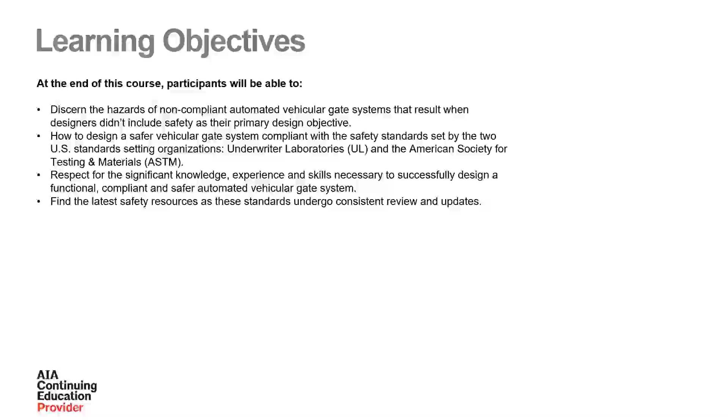A lot of information today. I don't expect you guys to retain all of it. Certainly give me a call and let me know if you have any questions related to these standards.

Anytime you automate a vehicular access point, UL 325 and ASTM F2200 safety standards come into play. Underwriter Laboratories generates the UL 325 standard, which covers the machine that moves the gate, whereas ASTM generates the F2200 standard, which governs the construction of the gate and how all the parts and pieces integrate together so that you're not creating pinch points and hazards.

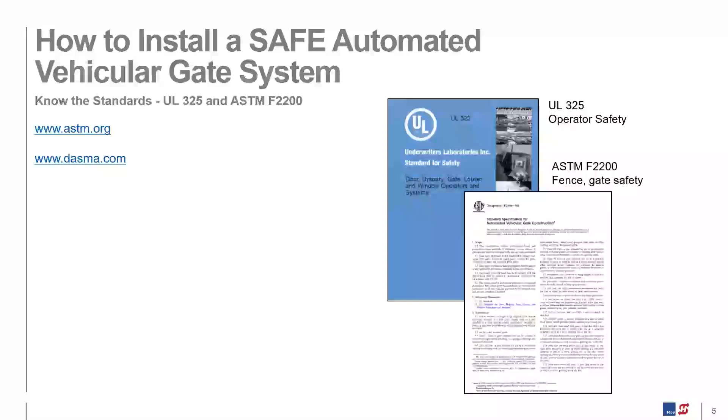These URLs are available to you guys: ASTM, of course, for the F2200 standard, and DASMA.com, which stands for Door Access Systems Manufacturer Association. It's an umbrella organization that consists of multiple gate manufacturers and gate operator manufacturers. We are one of them. They get together twice a year and come up with updates to these standards.

Back in August 2018, a couple things changed about this standard. If you're familiar with it, some of these might be a surprise to you. It's required to define all types of gates and the entrapment zones, of course.

The second bullet item is probably the thing that most encapsulates this entire standard: it requires 2 independent means of monitored entrapment protection for each direction of travel, both open and closed, for slide gates, but just one direction for swing gates. The closed direction is only required to be protected on a swing gate unless there's an entrapment zone that exists in the open direction. We'll get into that in a little bit.

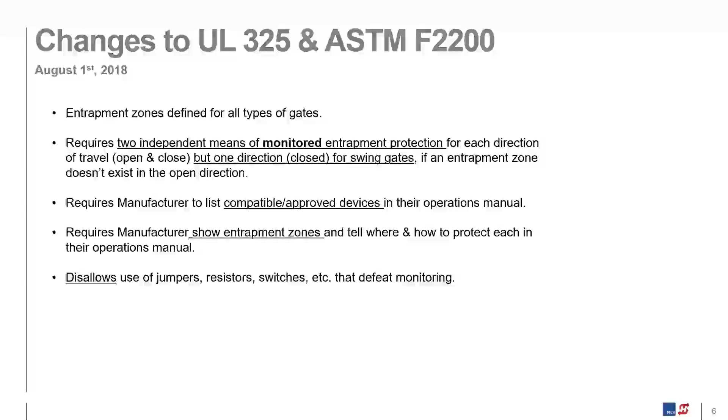It also requires us, the manufacturer, to provide a list of approved devices, and I'll be sending that information out. It requires us to show entrapment zones and how to protect those in our manuals, and it no longer allows the use of jumpers, resistors, and switches to defeat monitoring.

You'll hear from some out there that UL and ASTM standards are voluntary and don't carry the force of law. Nothing could really be further from the truth. Nevada became the first state to embrace them back in 2001, followed by Louisiana and Florida. By 2014, more than 50% of states and municipalities were including these standards in their building codes. OSHA includes this as a compliance requirement at the federal level, and it's also included in the International Building Code, IBC. So these standards definitely are not voluntary.

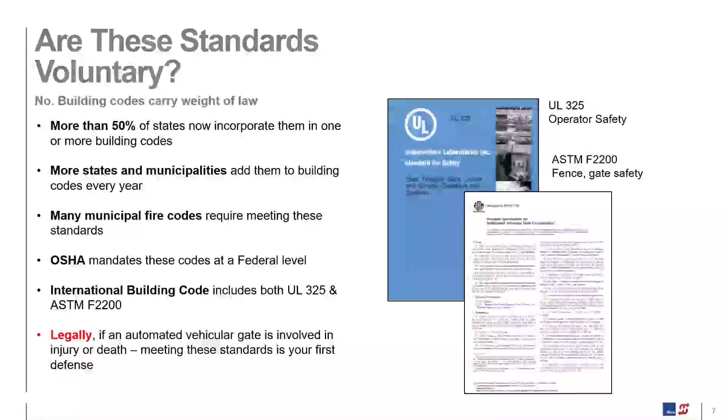The moving gate can cause serious injury or death. Believe it or not, these things do happen. A couple examples here: on the left, a young boy in Las Vegas unfortunately lost his life on this system. What happened is these kids would actually get in and out of the facility - this is an HOA facility. They put this pad-mounted swing gate through the fence line, and the kids would crawl through this gap to get in and out. One kid was crawling through there, the friend dropped his bike on the free exit loop, activated the gate, and unfortunately got him caught up in the gate system.

That could have been alleviated or mitigated by reducing this gap down to 2¼ inches - you're going to hear that measurement a lot throughout this presentation. That would have been compliant with the standard and would have prevented that issue.

On the right here, up in Mukilteo, Washington, there was a young boy who was unfortunately walking by a slide gate that didn't have proper fallover protection. That gate fell over, hit him on the head, and unfortunately he perished from that as well.

And just one more here, at Dickey Stadium, there was a janitor leaving work. You go through this gate system - we're not supposed to have pedestrians walking through a vehicle access point, but he was doing that. He had two things that he did here that we could have mitigated. He was able to reach through the gate panel and operate the gate while doing so - that access control should have been out about 6 feet. Really, the requirement is no closer than 6 feet, can certainly be further out. And the gate panel should have had proper coverage, bringing those gaps down to 2¼ inches up to 6 feet on the gate panel. Had both those things been done, that would have mitigated the issue.

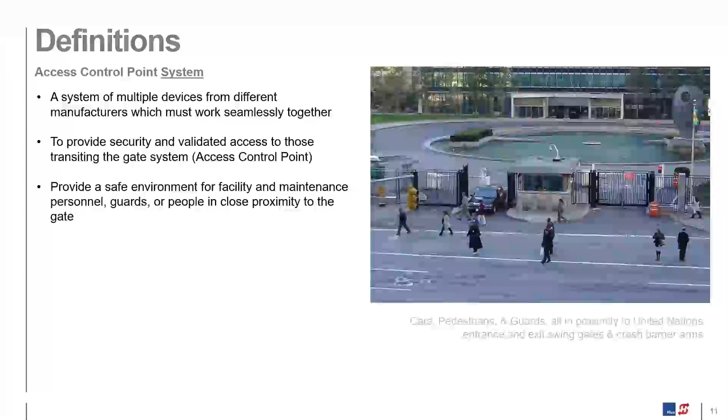Access control points can be hazardous to people, of course, as I've just mentioned, and also cause damage to vehicles if designed without adequate safety considerations. So as a specifier, you want to know how to specify the proper equipment and safety devices that result in a safe installation. Again, safety is really the most important design consideration here. Even for something like a nuclear power plant or a very high security facility like an airport or critical infrastructure, safety really needs to be at the top of that list.

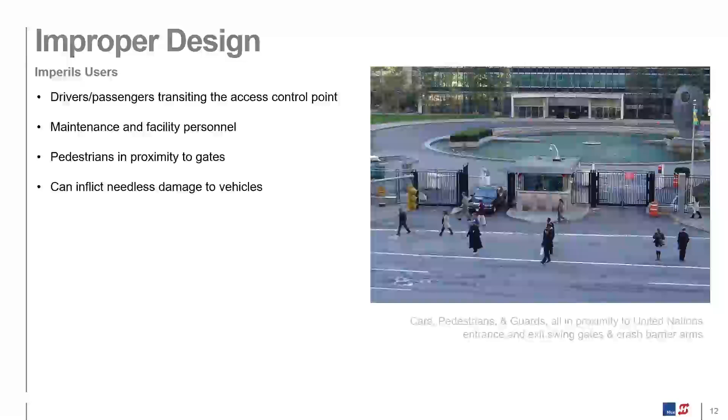UL 325 governs the machine that moves the gate along with the entrapment protection devices. It also calls out specific installation requirements like signage and placement of the safety devices. UL listed operators are typically tested by an independent laboratory - we use ETL. They'll test the gate operator and accessories and certify that they meet UL 325 requirements.

As I mentioned before, the most reliable resource, the best place to find the most up-to-date version of UL 325, is going to be the back of our manuals.

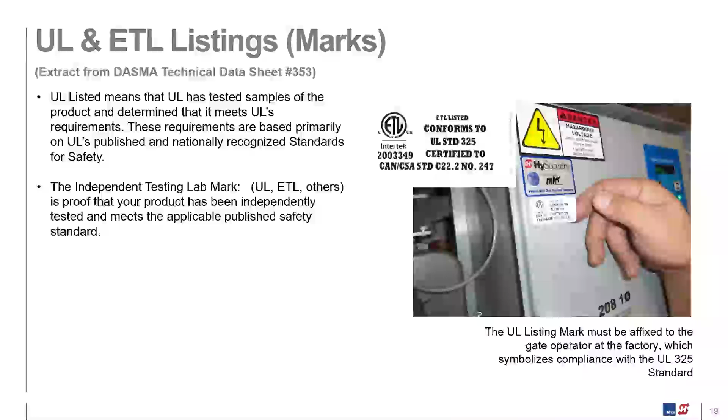UL calls out their classes in 4 distinct classes. Class 1 is up to 4 single-family residences. Class 2 is going to be more of a commercial environment, like an office park or multi-family environment.

One important thing to note on class 1 and 2 with a slide gate: class 1 and 2 have a speed limit of 1 foot per second on the slide gate operator only. When you get into class 3 and 4, there's unlimited speed limits. There are operators that'll go as fast as 3 feet per second and carry as large as a 5,000-pound gate panel that quickly. You don't want to put something like that on a class 1 or 2.

Class 1 and 2 are really characterized by general public access for the most part, whereas when you get into class 3, that's going to be off the beaten path. This is going to be more characterized by people traversing this access point that have credentials, a card key, they're supposed to be there, as opposed to general public.

Class 4 is going to be your high security environment. So anything that is critical infrastructure, like this United Nations building, is a good example. Airports, food, energy, anything that's considered high security would typically be class 4. This is where you're often going to find crash barriers as well as standard gate operators.

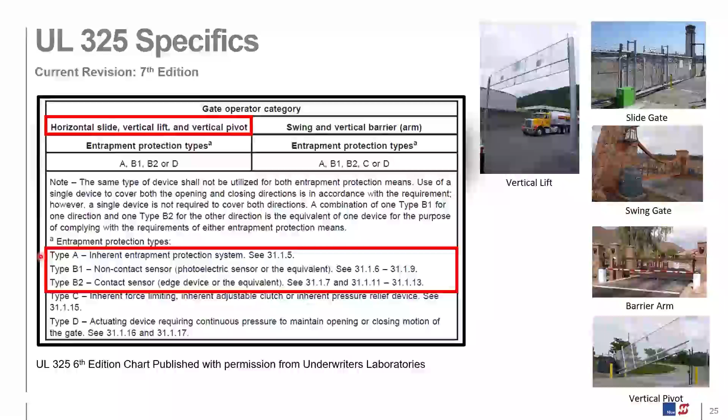Remember I talked about the need to have 2 independent means of entrapment protection, protecting both open and closed direction. This type A inherent entrapment sensor built into the operator is your one means, your first means of entrapment protection. Then you're left to decide on your secondary means, which is either type B1, otherwise known as a photo eye, or type B2, a contact sensor, otherwise known as a gate edge. You can use either one or a combination of the two. We'll get into that in a bit.

When it comes to swing gate operators as well as traffic control arms, pretty much the same thing applies. The only difference is instead of type A, we're utilizing type C, which is basically their swing gate or barrier arms version of the inherent entrapment sensor. It's basically a force limiting clutch that's built into the operator, and then you're left to decide on the secondary means of entrapment protection.

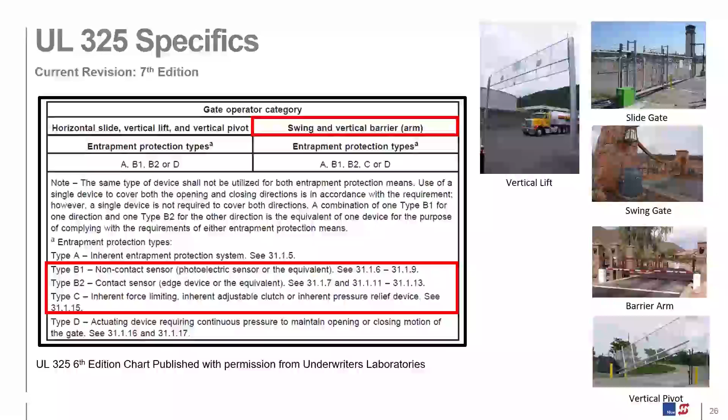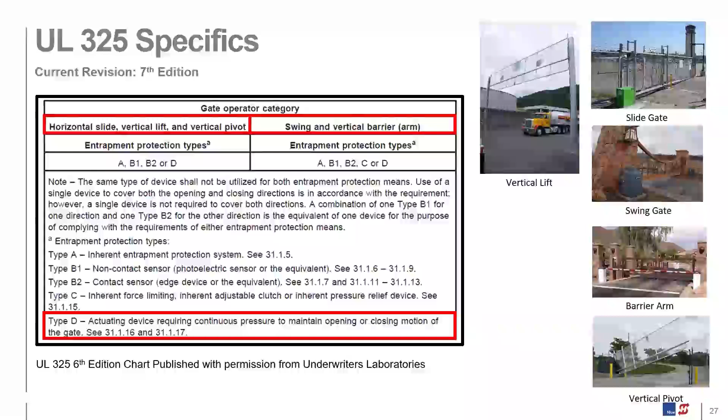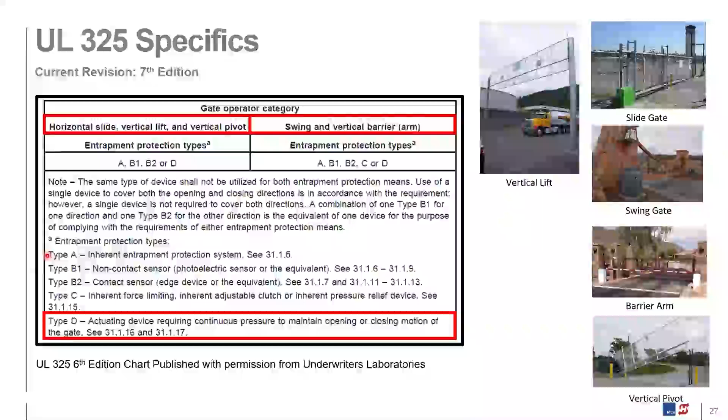Type D is a continuous pressure button. Let's say you've got a guard at a prison who has line of sight, either through video or in person. He can see the operator, can see the gate moving, presses that button, the gate starts moving, lets go of the button, the gate stops. So it's full control over the gate with that button. That would be considered a typical class 4 environment where they would use maybe this type D along with the inherent entrapment sensor built into the operator, and they're good to go.

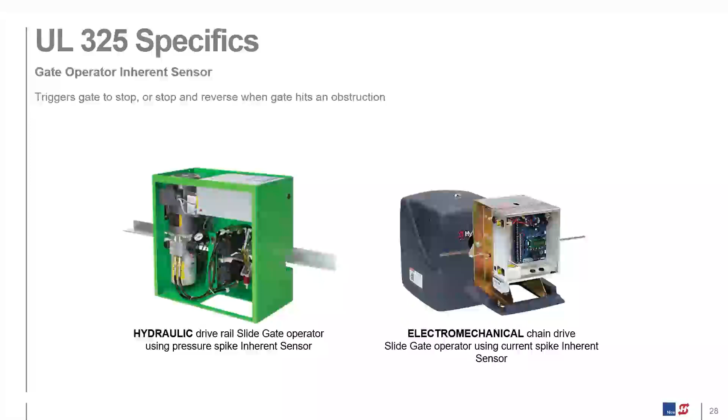Conversely, an electromechanical operator, very much the same end result, but it's looking for a spike in current. When it hits an object, it sees a spike in current, it stops and backs up. And then we're talking about the type C, their version of the inherent entrapment sensor for both barrier arms and swing gate operators - that's going to be some kind of force limiting clutch system built into the operator.

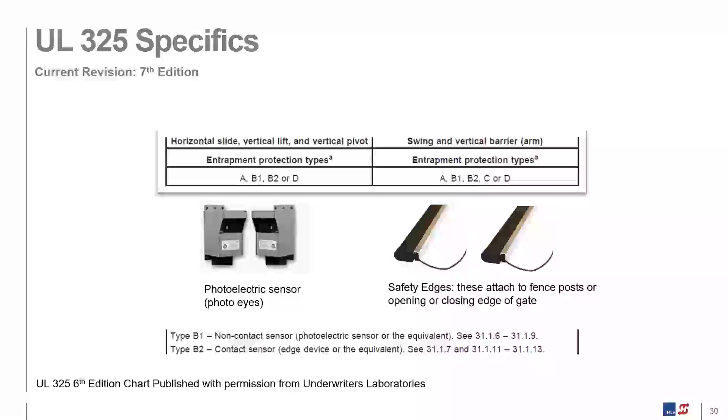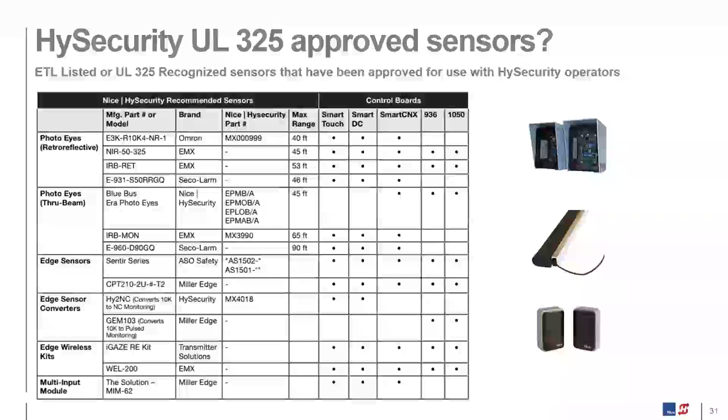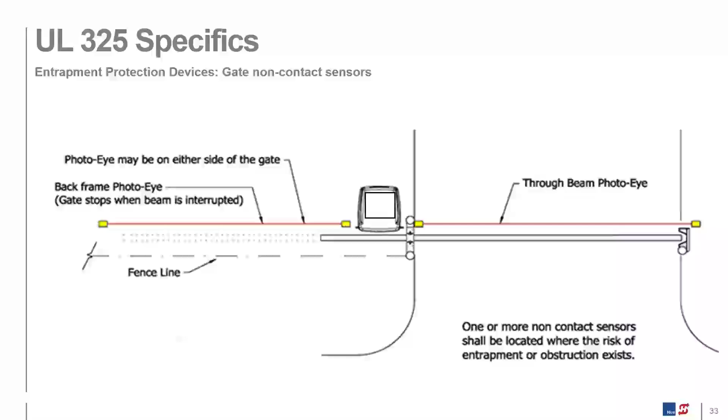So here's an example of utilizing photo eyes to protect both open and closed direction. As I mentioned, it's required on a slide gate to protect both directions. The old standard was just the closed direction - it's now required to protect both. In this case, they've got photo eyes covering the open, and then another set over here covering the closed. Plan view of that. Again, it used to only be required to provide this photo eye set for the closed direction - it's now required to provide the open direction as well.

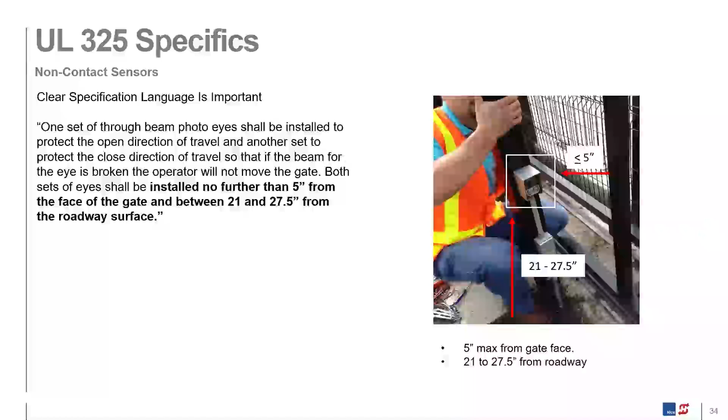Where to place these photo eyes - the recommended approach is about 5 inches off the face of the gate and between 21 and 27.5 inches off of grade, typically post mounted like you see in this photo. This is a suggestion, and there's a number of ways to do this, but that's the typical location for these.

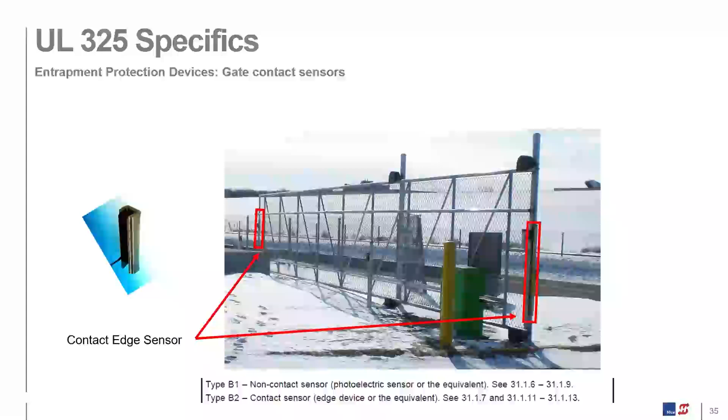In this case, they've used gate edges, both leading and trailing edge, to cover both open and closed direction. That is also compliant with the standard.

So I talked about the different types of gate edges. You've got wireless at the leading and trailing edge, and you've got the hardwired here on the guideposts. When do you need to use these? Well, if there's an entrapment zone that exists between the gate panel and that guidepost, then it's required.

Either put some material in there to bring that gap down to 2¼ inches, which is compliant, or put a hardwired gate edge here, which runs through conduit up into the operator and terminates on the control board. Either one is going to accomplish the task and be compliant. So if you have a little Johnny riding the gate, for instance, and he hits that gate edge, it's going to stop, back up, and not draw him into that entrapment zone.

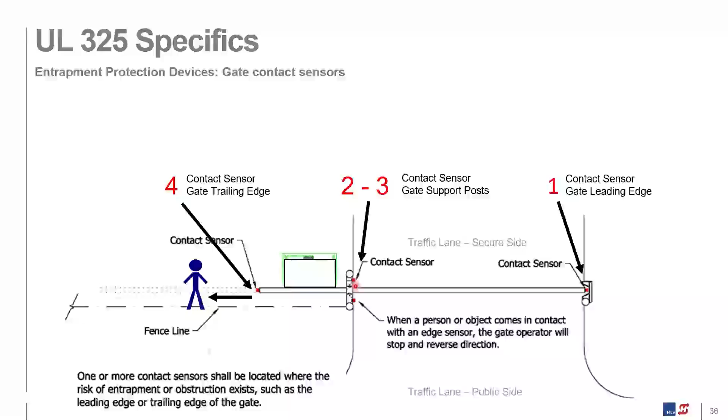A couple of things to know: they must hit an object to work, whereas a photo eye does not. They use battery for the transmitters. Those batteries typically last about 2 years and need replacement, and they're subject to climate wear, so they'll need to be replaced once they wear out.

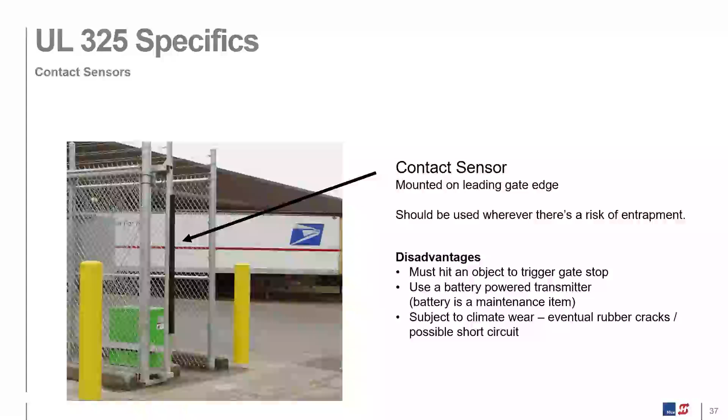This single family residence application is a class 1, and has a 1 foot per second speed limit on the slide gate again. Inherent entrapment sensor built in, and in this case they've used gate edges at the leading and trailing edge of the gate panel to cover both open and closed direction. You can actually see the transmitter right here for the gate edge.

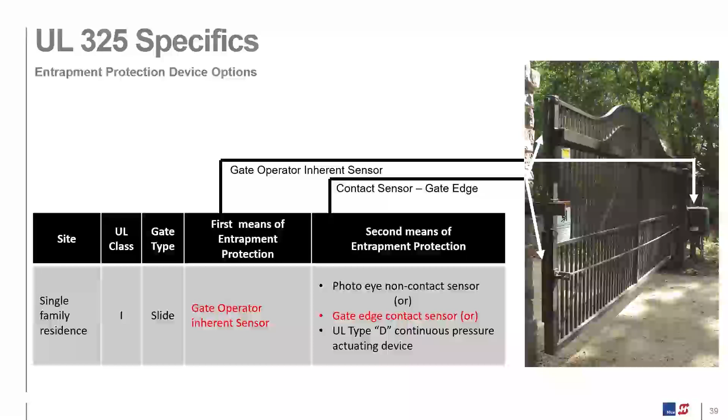Having said all of that, you can tell there's a number of combinations of ways to approach compliance. You could have a combination of gate edges and photo eyes, etc. Our recommendation for slide gates is to go with photo eyes. The reason being that most of the installations we're involved with have a lot of radio frequency traffic, RF, and those wireless gate edges can cause havoc with that kind of thing.

So just to get around that, we recommend using photo eyes for both open and closed direction, and then putting either some material in here or a hardwired gate edge if there's an entrapment zone that exists between the gate and the fence line.

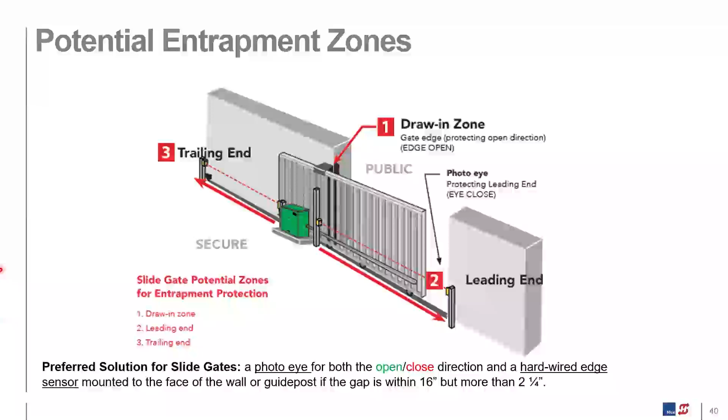For swing gates, as I mentioned, it's only required to protect the closed direction unless there's an entrapment zone in the open direction, in which case you'd want to put a photo eye in that zone.

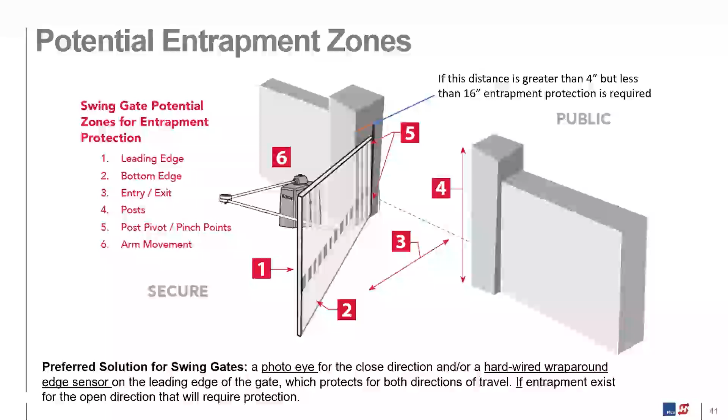Warn before operate is built into all operators, but it used to be required as part of the standard, is no longer. However, it's a really good idea to continue with that. It is something you can disable. If you're in an HOA facility where that's going to be an annoyance, it can certainly be turned off.

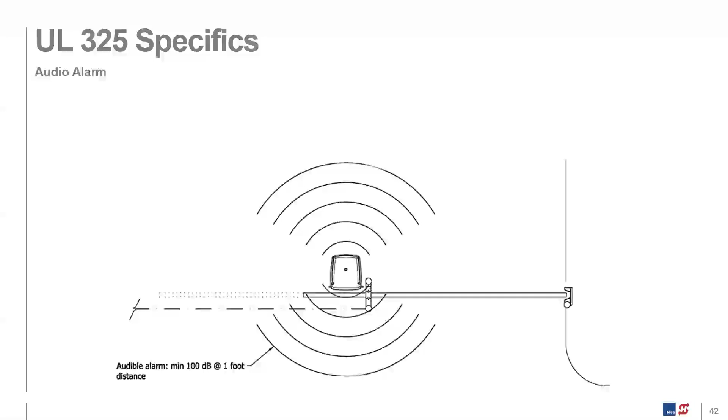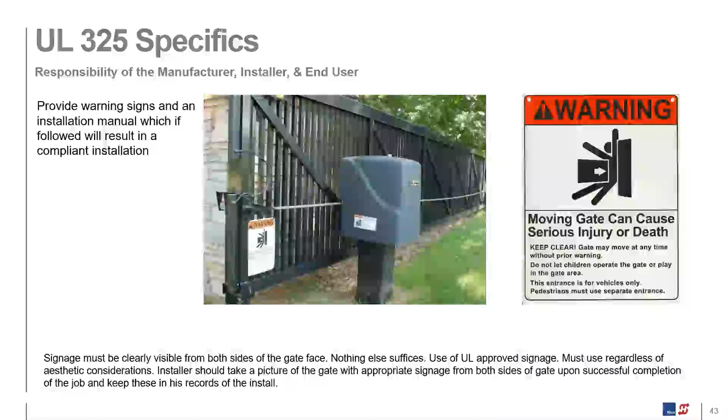Anytime you automate a vehicular access point, separate pedestrian access is required. A lot of people are surprised by this. We don't want pedestrians walking through the vehicle access point. It's not required to have a PED door for every automated access point, it just needs to be an obvious way for pedestrians to get in the facility without having to go through the vehicle access point.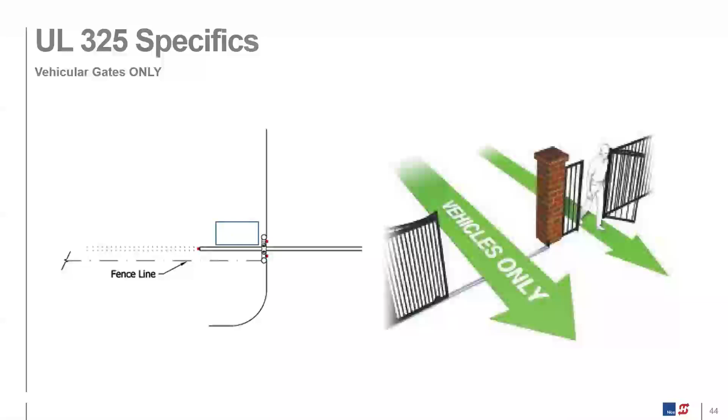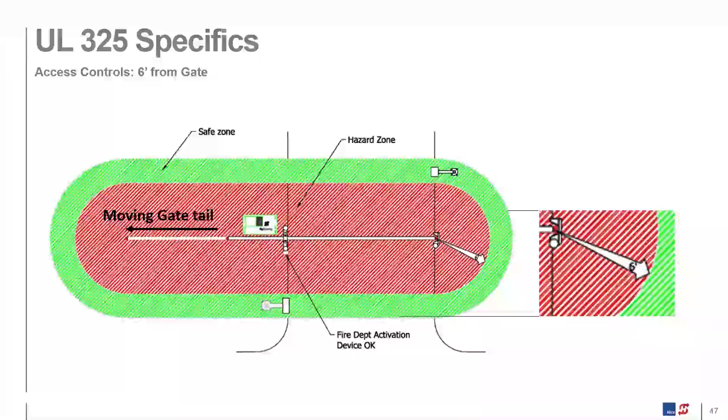So access control, as we mentioned before, that janitor leaving Dickey Stadium was able to reach through the gate and operate the gate while his arms are through the gate system. So the requirement here is that anything such as a card key system, a gooseneck, a keypad, anything that's going to require somebody to roll their window down, that needs to be no closer than 6 feet from the gate system, 360 degrees around the gate system. That includes both ingress and egress. Can be further away, but no closer than 6 feet. We're trying to reduce or mitigate the likelihood of this happening.

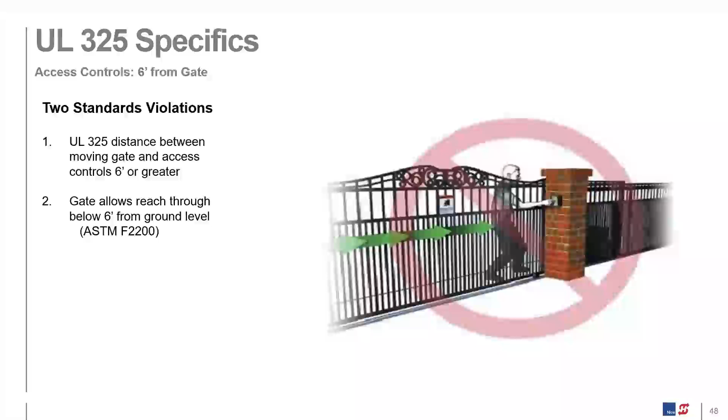When it comes to barrier arms, they do not fall under the UL 325 safety standard unless a barrier arm is moving within 16 inches of a fixed object. So that could be a bollard, a fence line, you name it. If it's out in the open like this, there's no requirement for any additional safety devices other than the Type A inherent entrapment sensor system that's built into the operator.

However, I recommend people put photo eyes under their barrier arms if they can. It's just a belts and suspenders approach to it. And if you did so, you'd put it like this. You'd want to put the photo eye directly underneath the gate arm and provide protection there for anybody walking through that access point.

You'll notice in this graphic that we're showing in-ground loops. Loops are for vehicles, whereas what we're talking about is safety for people. But loops are very important. You want to make sure you do have vehicle detection loops. If you don't have those, you likely hit the vehicle with your gate. So it's a very good idea to make sure you're putting those in there.

If you're not familiar with loops, what it typically is, is a saw cut into the pavement. They'll put loop wire in here and seal over the top of that. They'll run a conduit off the corner up into the operator, and those loop leads will terminate on a loop detector. This wire is creating an electromagnetic field 360 degrees around that wire.

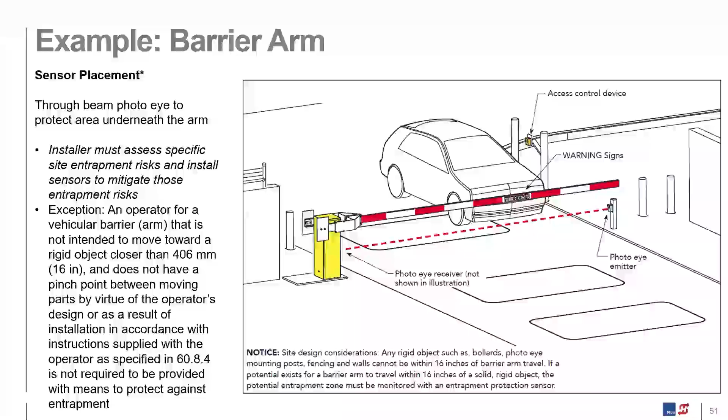If you're ever specifying a barrier arm, just make sure you specify a good quality one with a bumper on the bottom. I like to comment on this photo. You'll notice that there is both an automated swing gate and a barrier arm here. Obviously, in this case, the system got an open command and everything went open at the same time, which is fine.

But oftentimes what you'll do here is connect the two operators and sequence them. So in that case, the swing gate will go open, and when it hits its open limit, it sends an open command to the barrier arm to let the vehicle through. So it's a form of traffic control, and can also be a form of mitigating tailgating.

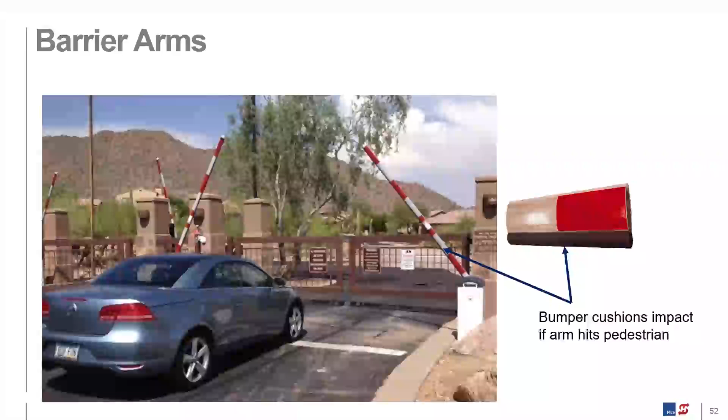All right, so that's UL 325. Let's jump into ASTM. This is a standard that was established back in 2001, and it dovetails with UL 325. So anytime you're automating the vehicular access point, ASTM F2200 comes into play just as much as UL 325 does. You'll find that most gate manufacturers are going to build their gates in compliance with the standard, but oftentimes there's going to need to be some customization to the gate to maintain compliance.

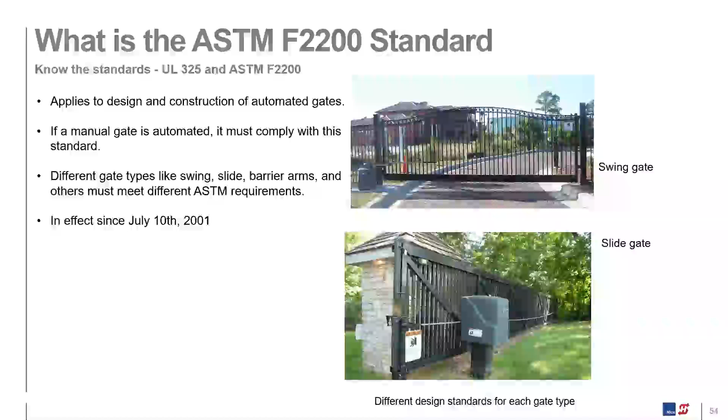ASTM defines an entrapment zone as a space between any part of a moving gate and a stationary object. When that space is within 16 inches but greater than 2¼ inches, the standard considers that an entrapment zone. So we're talking about this gap here, between the fence line and the slide gate operator. This is the gap we're measuring. If it's within 16 inches but greater than 2¼ inches, it's considered an entrapment zone.

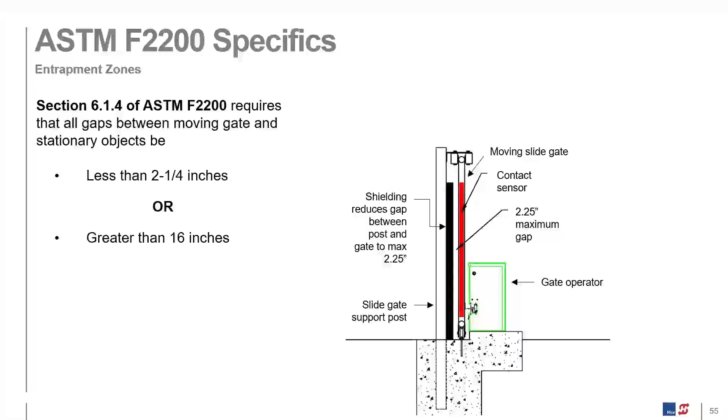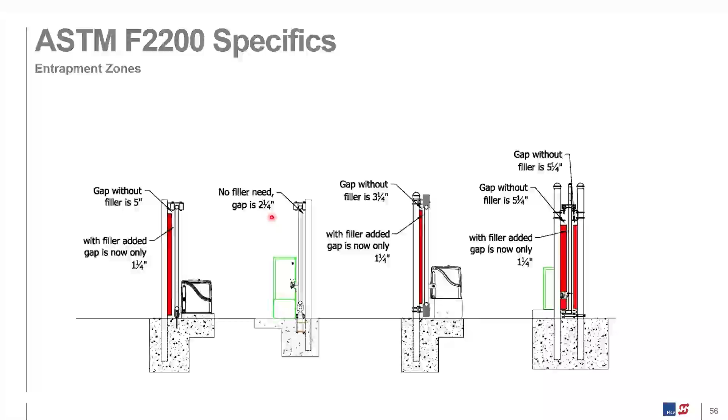The one on the right is out of compliance. The one on the left is likely within compliance at 2¼. In this example, they did a good job of screening off here, but providing this is within 16 inches, they should have put some screening in here as well. Obviously you have to cut out a notch for the slide gate rail, but that one should have been covered as well.

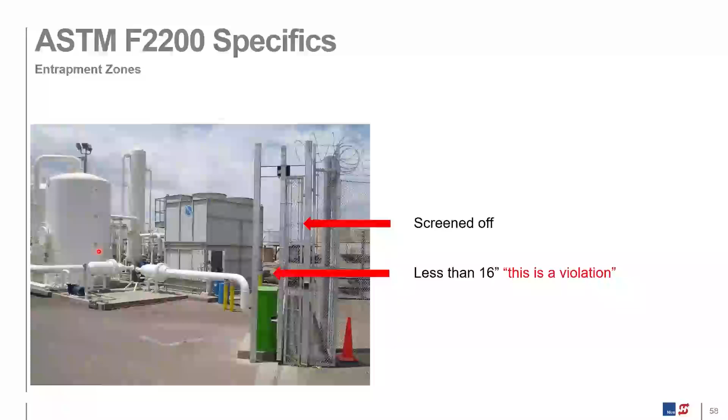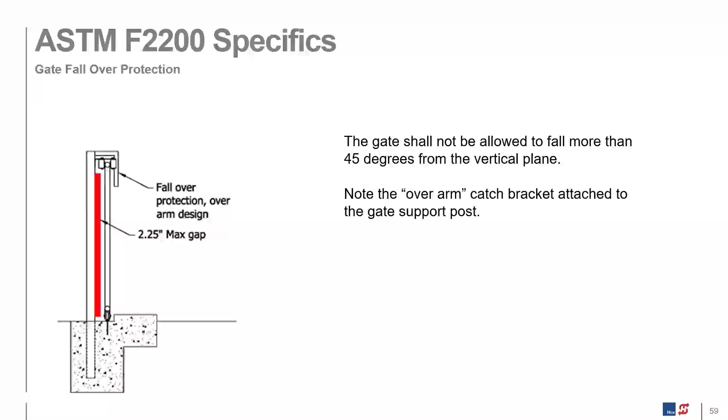Fall over protection - we talked about that slide gate that fell over and hit that kid. If they had proper fall over protection, that would not have happened. You can utilize an over arm design like you see here, that's fully compliant. Typically you'll see something like this, but basically what you're looking for is to make sure that the gate, if it becomes detached from the operator, cannot fall over more than 45 degrees.

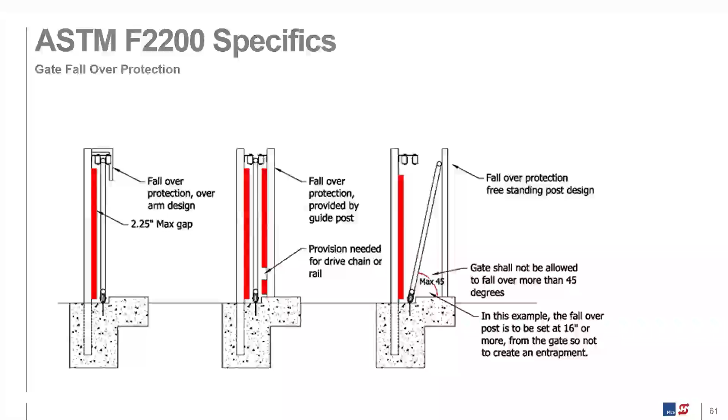This is a great example of it done properly. You can see through the entire travel of this gate panel that their fall over protection is applied all the way through.

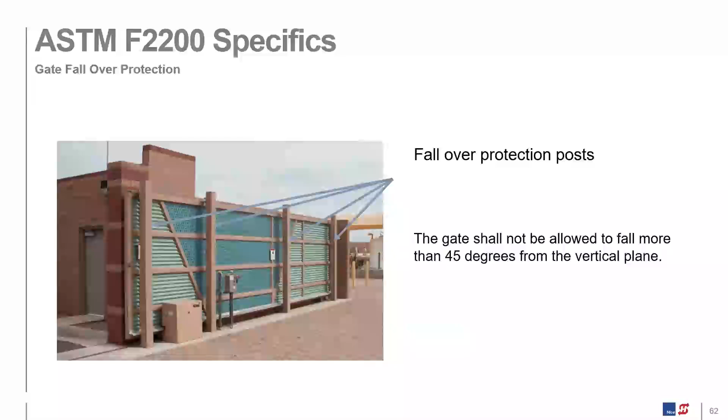When it comes to swing gates, as I've mentioned earlier, you're only required to protect the closed direction unless there's an entrapment zone in the open direction. So if this gate in the fully open position is over 16 inches or at or over 16 inches, it's free and clear, no issues. If it's within 16 inches between the fence line and that gate panel, then you want to put a photo eye in that zone as well as a photo eye across for the closed direction.

For swing gates, you want to make sure that you're utilizing a rounded gate edge as opposed to one that would be used for a slide gate. This is, of course, because the gate panel is going to sweep, and you want to be able to detect in multiple directions.

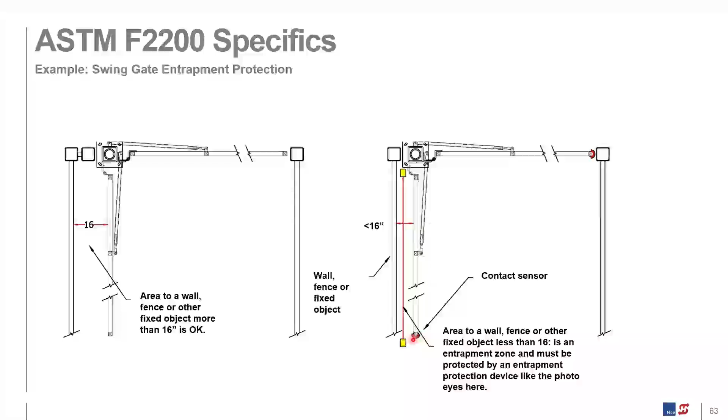Anything above 6 feet is fine at 4 inches on center. Below, from grade up to 6 feet, no gap in the gate can be greater than 2¼ inches. So if you're working with a gate panel that is at 4 inches on center, a lot of times people will put some kind of fabric or expanded metal in there that's going to take care of this requirement.

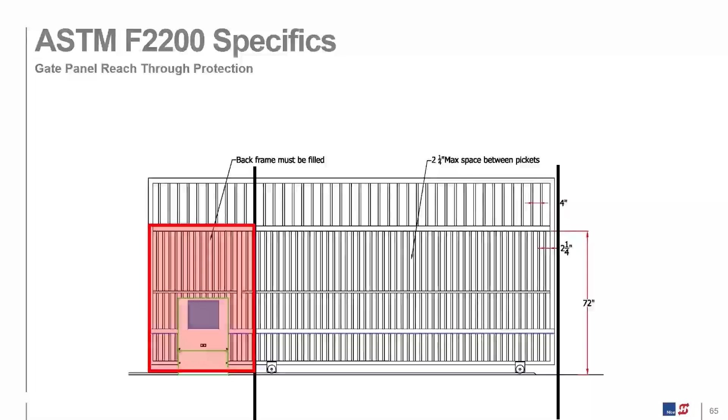You want to make sure that the back frame on the gate panel is also covered. Oftentimes that gets missed - people are trying to reduce weight and materials and cost, basically cut corners. So you want to make sure you're covering that. The old standard used to be up to 4 feet on the gate panel, it's now up to 6 feet. Again, you want to make sure you're covering that back space.

Additionally, the fence line that the gate panel is traveling across also needs to be covered up to 6 feet. So if this is a 30-foot gate, 30 feet of that fence line needs to be applied with some sort of material that brings that down to 2¼.

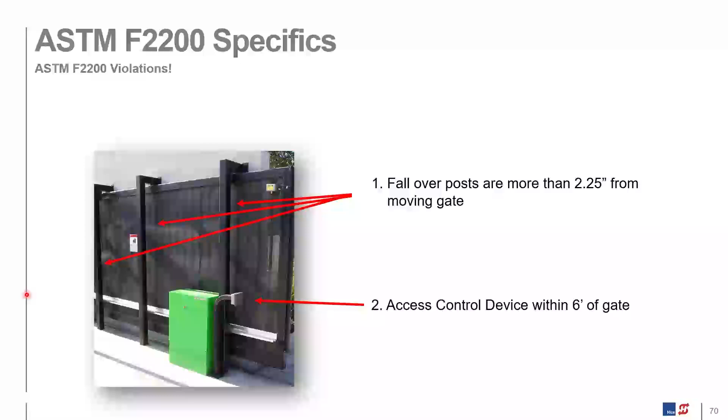So when we're talking about slide gates, there's basically two types: cantilever and ground track. Ground track, otherwise known as V-track, rolling gate, you name it - people have a bunch of different ways of using terminology for that gate.

You don't have issues with grade and that kind of thing - it's just a lot easier install and less maintenance. However, you are limited to a 30-foot clear opening. Once you get over that, you're typically going to go to a V-track or ground track gate.

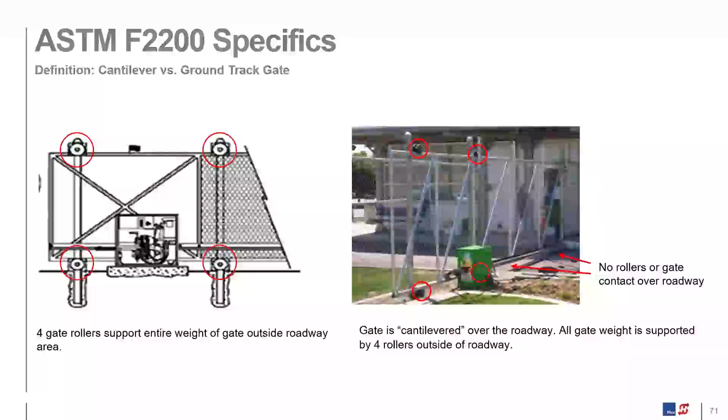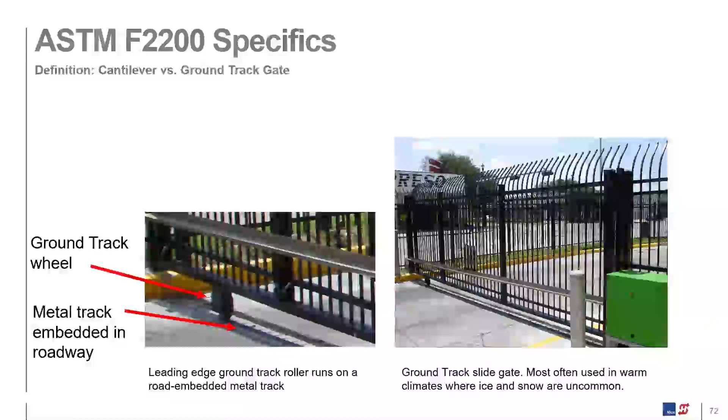When it comes to V-tracks, as I mentioned, you typically want to go here if you're going over 30 feet in terms of clear opening. That's basically a concrete strip with upside down angle iron and a V-shaped wheel riding on that track, typically used for much larger, heavier, wider gates. But there is some maintenance involved here - the track can come up over time, the gate can jump track, and there can also be debris that causes issues with the wheels.

And this is all kind of a unique one - ASTM requires that the gate panel cannot move under its own gravity if it becomes detached from the gate operator. So this is really more of an issue with ground track, V-track gates than with the cantilever. Cantilever, of course, is just going to fall down and rest up against the fallover post. So not a lot of great solutions here - obviously the most obvious one is that if you can regrade the area and get it more level, then you're good to go. But the bottom line is the gate cannot move under its own gravity if detached.

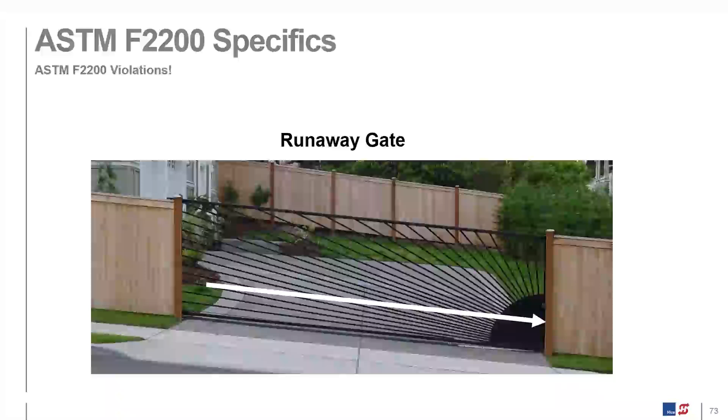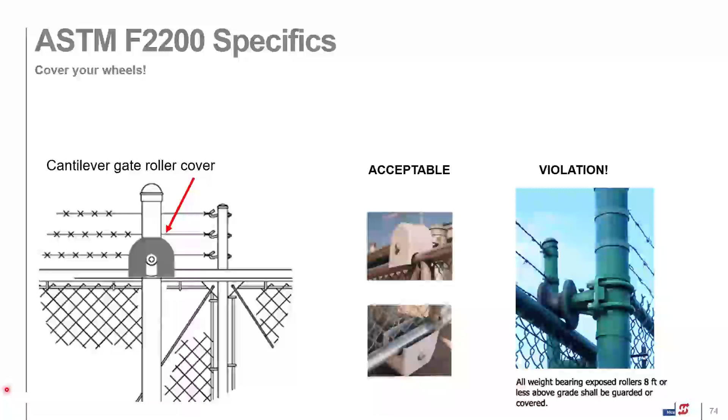It is required that all type 1 cantilever wheels are covered unless they are above 8 feet. So if they're over 8 feet, you're good to go. If they're below 8 feet, you do want to make sure you're providing covers. And of course, that also includes the guide rollers as well, and also your V-track wheels.

So gate protrusions are a puncture hazard when a gate hits a person in either direction. So what's not okay is gate hardware, such as chain adjustment bolts, that extend past 1/2 inch. Anything extending on both the side and bottom of the gate panel has to be cut back to 1/2 inch - can't be any greater than that. The pickets coming out of the top of the gate are fine as long as they're in line with the gate. At 7 feet, they can curve over - so you see those gates with the pickets curling over at the top. It's got to be 7 feet before it does that.

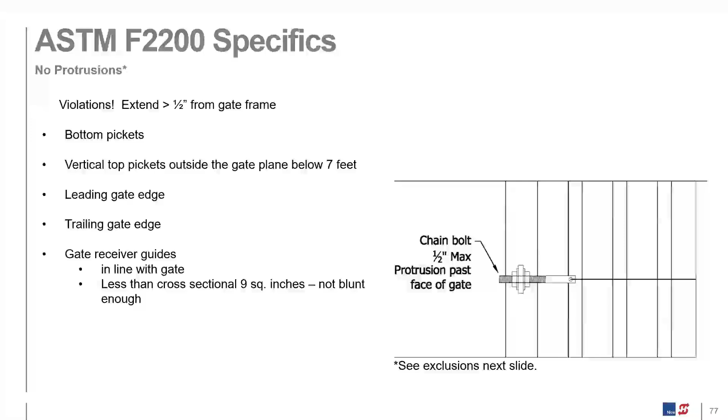So leading gate edge, trailing edge, gate receiver guides, etc. - what is acceptable? As I mentioned, the pickets can be in line with the gate, and the top pickets can curl over at 7 feet. Safety devices such as gate edges, wheels supporting ground track, gate locks, and positive stops are okay.

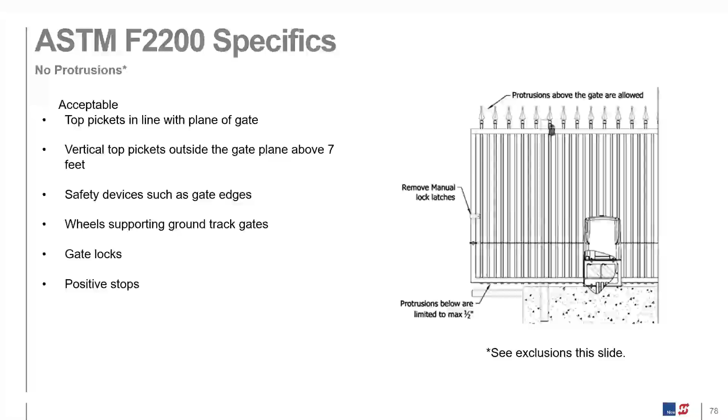When it comes to barbed wire, the gate panel must be a minimum of 6 feet. And when it comes to razor wire, that's a minimum of 8 feet in terms of height.

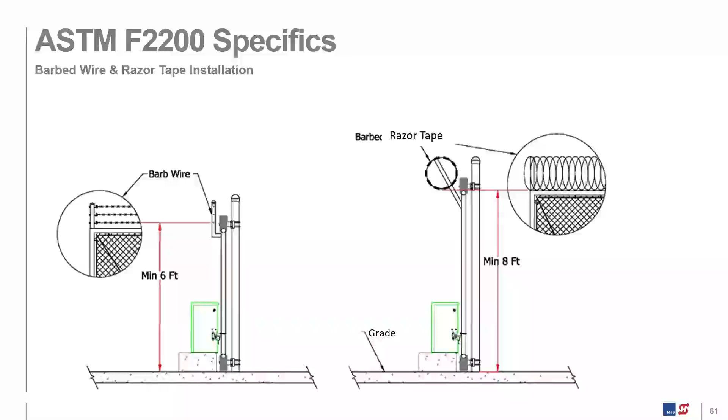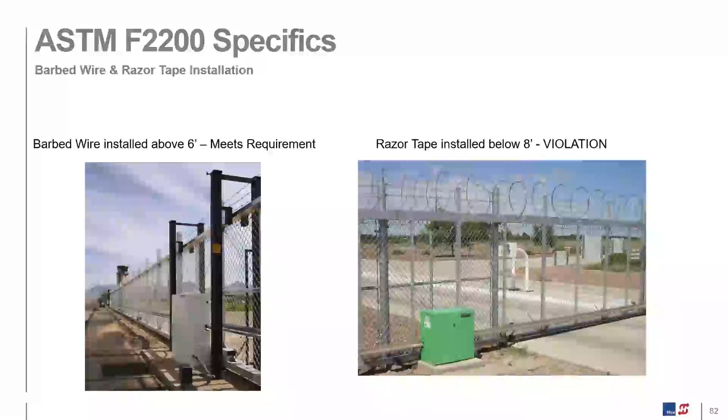ASTM also requires positive stops. So again, if the gate becomes detached from the operator, and this is really more of an issue with ground track gates, you want to make sure there's a positive stop, so it's stopping the gate from going down a parking lot and hitting the vehicle or somebody.

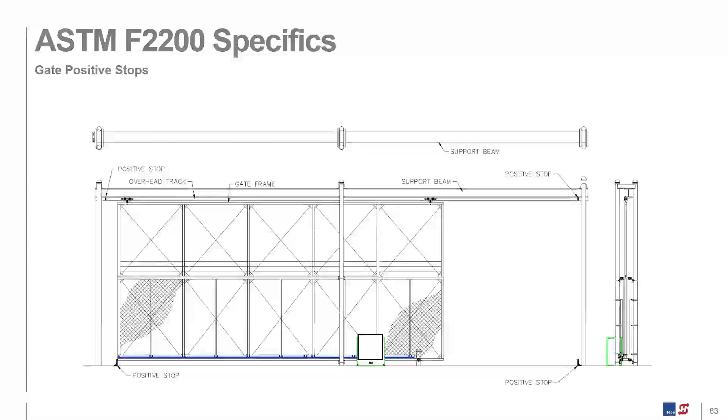And it's a good example of a positive stop on a V-track.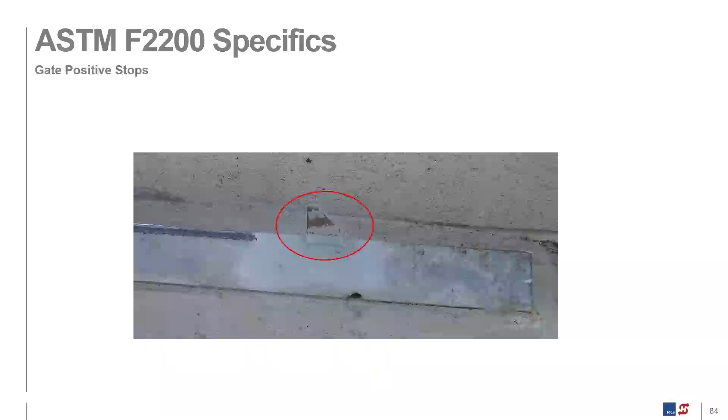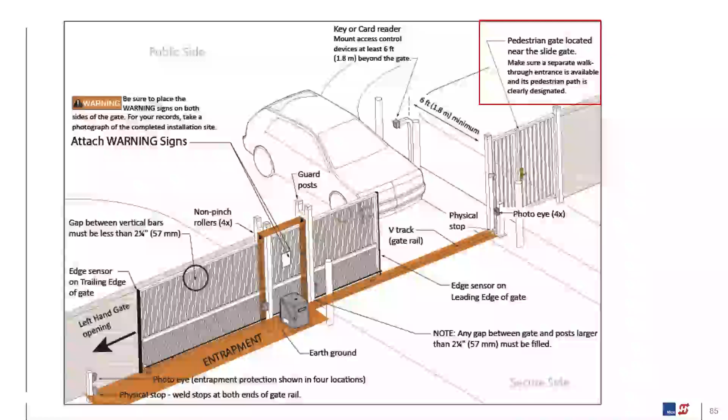So this graphic, this is another document that will be sent out. This graphic covers the entire presentation. Just looking at this, you've got everything we talked about. You've got your access control at 6 feet. You've got your pedestrian access, separate pedestrian access. You've got your positive stops. You've got your follower post, your signage, your gaps brought down to 2¼ inches. Your gate edges on the leading and trailing edge. You've got your gate, your photo eyes covering both open and closed direction.

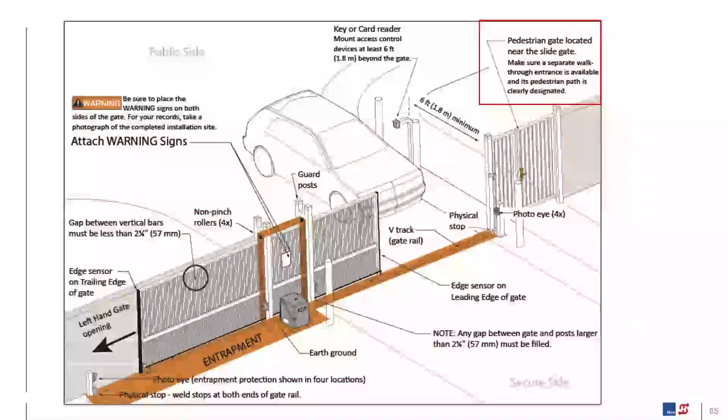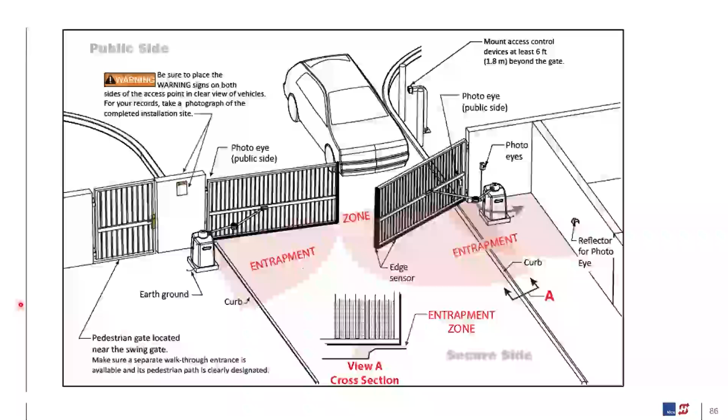All right, so that's the end of the UL portion. I'll jump into the last couple of minutes here and cover our products at a real high level.

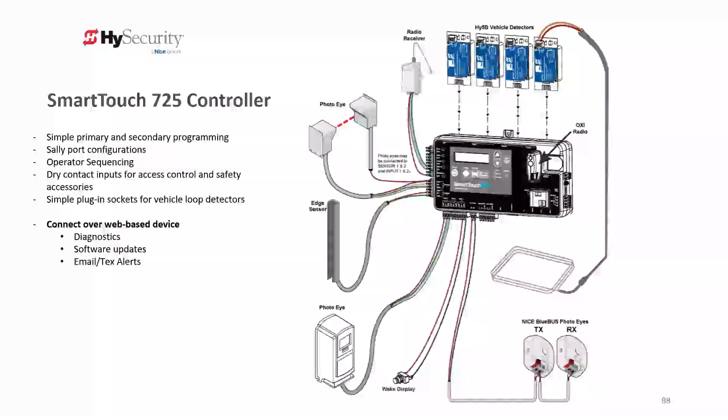So we cover residential, commercial, industrial, and hostile vehicle mitigation, otherwise known as crash-rated barriers. I won't go into the residential.

I'll start with commercial. So we have commercial operators that are electromechanical 24-volt DC operators. These are typically competing directly with companies like LiftMaster, Door King, that kind of thing. Your standard chain-driven slide gate operator, Slide Smart DC, takes up to a 1,300-pound gate panel, and then our Slide Smart HD will take up to a 3,000-pound gate panel.

And then we've got our traffic control barrier arm, strong arm park DC. That's got an arm that'll go out a maximum of 14 feet. If you need to go longer, we have that covered in our industrial line.

So our industrial operators are continuous duty. They're hydraulically driven. They contain fewer moving parts so that you'll see greater reliability in these. We like to measure their lifespan in decades versus years. So these things, we've seen them in play for 20 plus years and still going strong.

And you'll find these specified in UL class 3 and 4 sites typically, if critical infrastructure such as DOD, petrochemical, substations, fire, police, you name it, those kinds of installations. Our slide driver offers speeds up to 3 feet per second in class 3 and 4 sites, and we'll move up to a 20,000-pound gate panel at 1 foot per second with the slide driver 200 there.

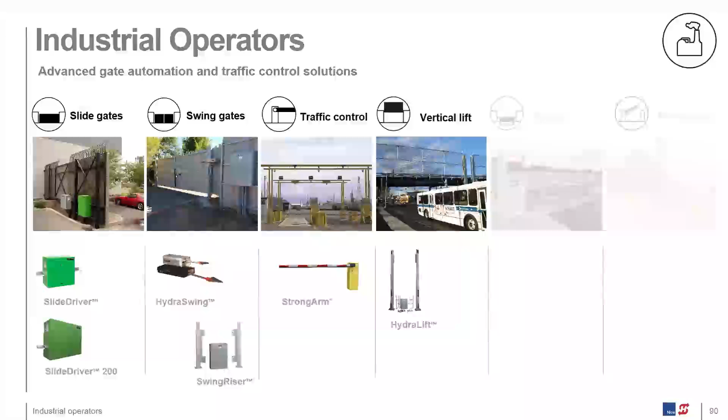And we also offer a complete suite of hostile vehicle mitigation barriers, otherwise known as crash barriers. These are typically specified in critical infrastructure, DOD, petrochem, state, federal, you name it. These are engineered and field crash tested to ASTM, IWA, and PAS certification standards. A strong arm M30, M50, those barriers will stop a 15,000-pound vehicle doing either 30 miles an hour or 50 miles an hour.

Your WedgeSmart is essentially your strong arm park traffic control arm integrated in a crash wedge. So it's engineer rated to FS30, which means it'll stop a full-size sedan traveling at 30 miles an hour. And then our big boy, the HydraWedge SM50, that's a 15,000-pound vehicle doing 50 miles an hour. Typically what you'll see is something like the strong arm out at the perimeter, and then something like a wedge further into the facility as a final denial barrier.

And then we have our field crash tested bollards. We have fixed, removable, and active bollards. Obviously your fixed are alongside of the road. The active are going to be in the lane. People are typically choosing these for their aesthetics and the ability to allow pedestrians to traverse through. Yeah, that's pretty much it on the bollards.

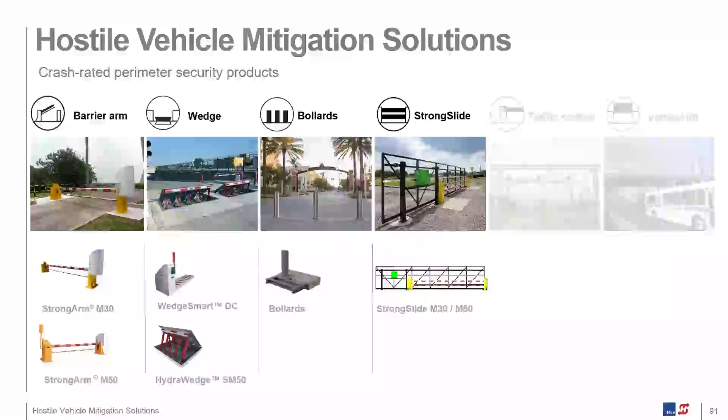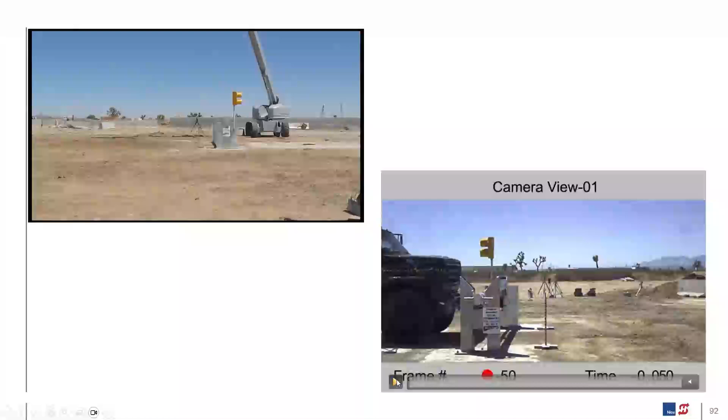I'll give you an idea how these get tested in the field. We go to KARCO in California and perform these tests. This is the Strong Arm M30, stopping a 15,000-pound vehicle doing 30 miles an hour.

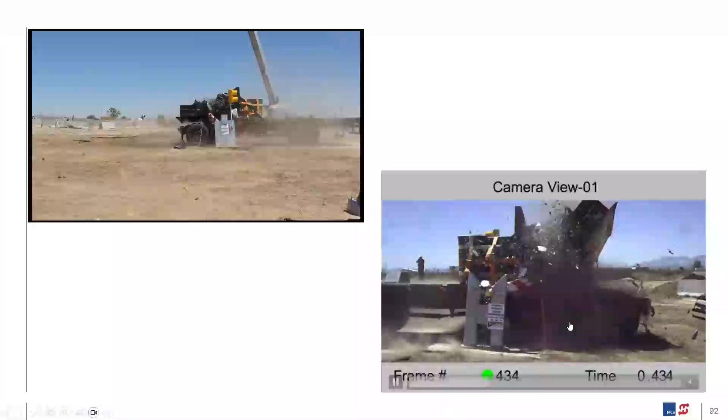You'll see here, we're actually measuring the back of the cab, how far into the secure zone it goes. This stick right here is a P1. There's P1, P2, and P3. So you can see that actually made a P1 certification on that crash test.

We had a little issue here just a few months ago. There was an auto dealership that would keep thousands of cars in a very large area for storage. Criminals would typically go in and steal a large truck and run it through the gate, then go back and steal the rest of the vehicles and drive them through. We actually mitigated that - they tried twice and didn't get through, and that was the Strong Arm M30 right there.